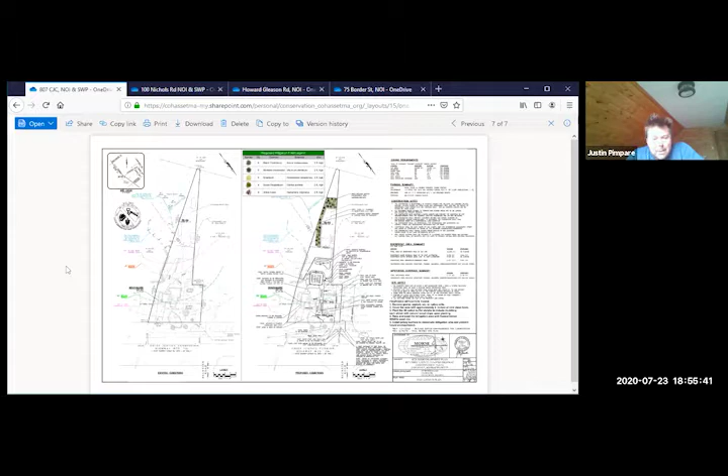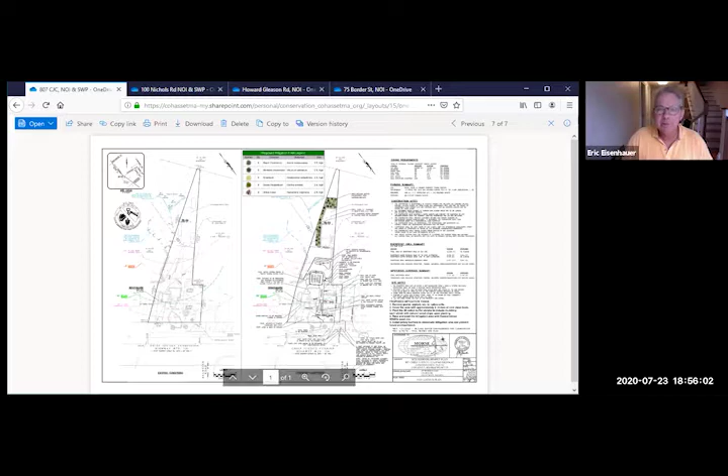Thank you, Jay, and Jeff, thank you for waiting. Before we begin, one question - I can't read your chart, is there any way you can increase the clarity? It's very fuzzy. I can enlarge it in steps. Still fuzzy - we'll have to work on it outside the meeting. There, that's better. That's good, it just takes a second to load when you zoom in. Okay, that's fine. Sorry to interrupt, but if there's a problem we'll go back to the old school method of me sharing my screen - I just won't have the Zoom annotation. That's fine, Jay, that's good.

Jeff Hassett here on behalf of the applicant. This project was approved in 2015, amended in 2016, and the permits expired before any work was done. We've resubmitted the exact same plan from the last hearing. The only change is the back area where we're enhancing the wetland buffer. There was also a question about how the BVW connected to the mean high water - it was flagged by Brad Holmes, but we didn't show it because that enhancement area was kind of an afterthought added at the last minute. But in his notes, and clear in the field, the wetland line of the BVW continues right alongside the mean high water.

The other thing you asked us to look into was whether we could improve the enhancement area further. This isn't mitigation for any proposed work - it's just an area where we saw encroachment and thought we should enhance it with plants. So we're proposing jersey barriers along the edge of the asphalt. Beyond that edge there's a gravel area with debris and parked cars - anything beyond the barrier will be cleaned up. They'll put down loam and a seed mix, which we didn't specify before, and then plant it. We increased the plantings from 16 to 30, so it's about as dense an enhancement as we can do, and the barrier will prevent future encroachments.

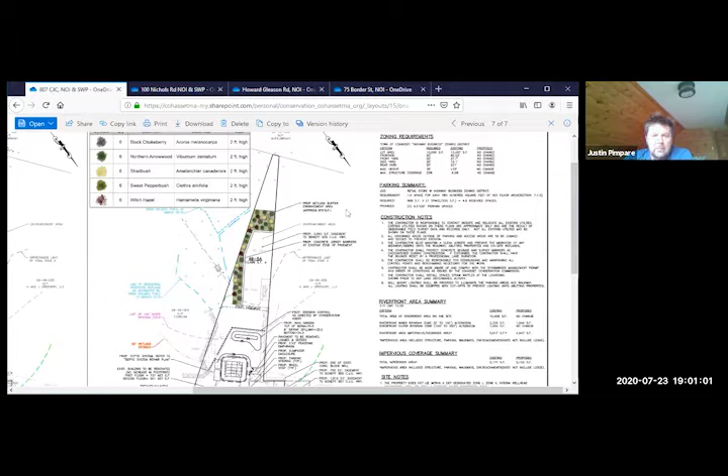Any further comment from the commission? One of the standard conditions is that any plants associated with the order of conditions survive for 3 years. So they would have to guarantee that these survive for 3 years at a minimum.

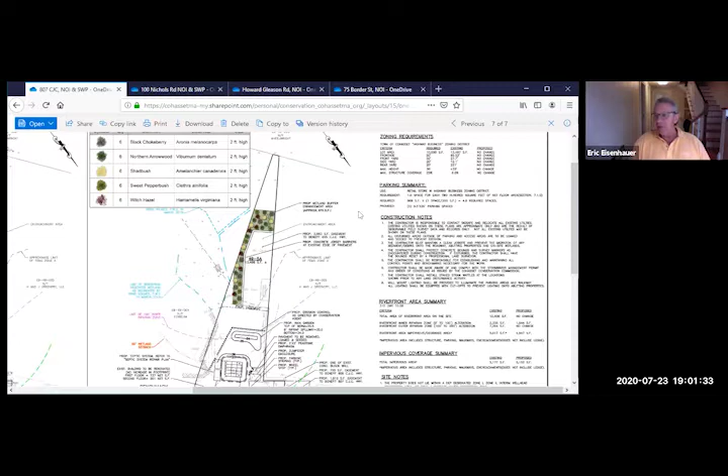There's no irrigation, is there, Jeff? No, there isn't. But that's really the advantage of having native plants. They should be able to survive in the summer, where they tend to slow down in this environment without external irrigation. So it would be the tougher type of plants. That's good.

They're out there with the hose every day watering the plants in the nursery. They could hit these as well, but there won't be an installed irrigation system. Again, I think if anyone's concerned about the plants, I would like to think that Village Greenery is going to just water these plants as well. It's literally on the site.

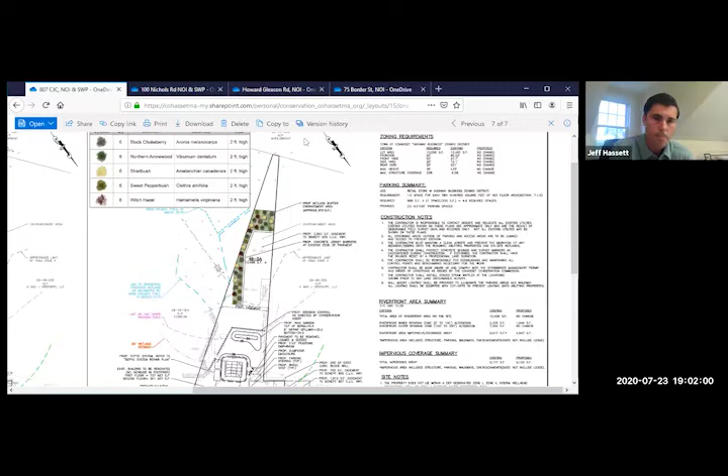Further comment from the commission? Any questions from the audience? I'm not seeing any questions from the audience through the Q&A.

Okay, well, not hearing any more comment, I think that this is a significant improvement from the original application, with the removal of the old cesspool and now a full septic system in place, buffer enhancement, the storage container to be removed, which was basically in the wetland itself, and among other things are a huge improvement to the site. So I'm in favor of moving this forward.

So, to move these things along, Jay Pimpare would like to make a motion to issue a variance for work within the 50-foot buffer zone at 807 CJC Highway. Second by Mr. Eisenhauer. All those in favor, we'll do this by roll call vote. Jay Pimpare, aye. Chris McFarland, aye. James Rosback, aye. Eric Eisenhauer, aye. Marianne, aye. Alex Coenis, aye.

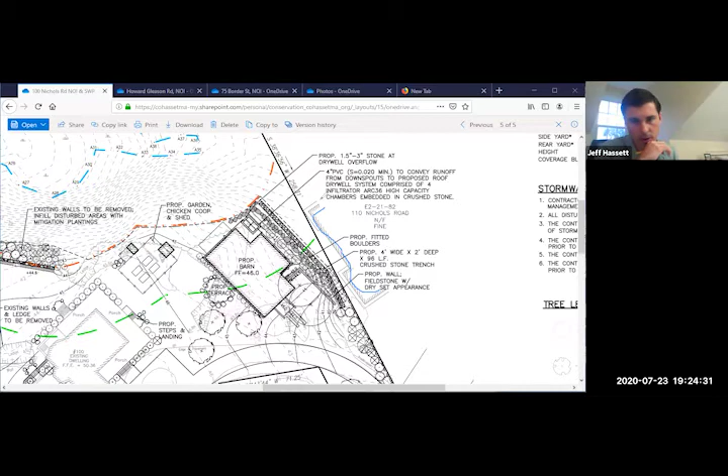Are you talking about the neighbor in front at 94 Nichols, or the abutting neighbor at 110? 110. So the stormwater will no longer go, or is no longer proposed to go, over to that little area. Yeah, right there, exactly. That's a critical area, a low point immediately adjacent to the house, right next to the property line. So anything we can do to get the water away from that area is beneficial.

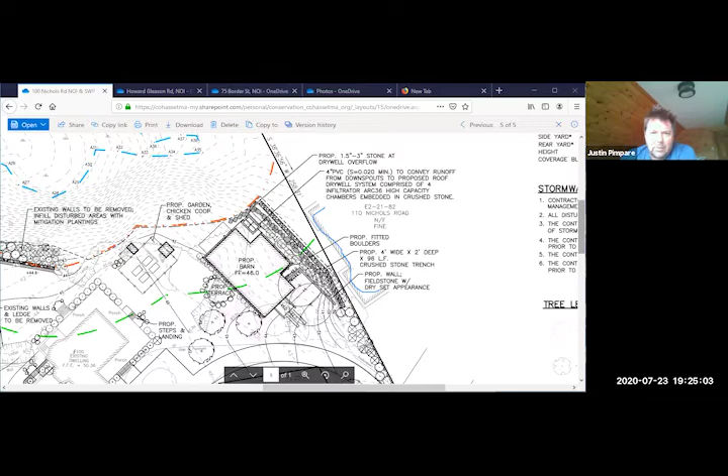Do we have a planting plan that goes along with this project? Maybe a good time to turn it over to Sean or anyone else to answer that question. But do we have a landscape plan for this? We didn't submit the actual landscape plan. All the trees are shown on this site plan, and we have the typical tree legend on the plan, and we specify all the trees to be native from your list of approved plantings - deciduous trees to be 3 to 4 inch caliper, and evergreens to be 6 to 8 feet tall. The final planting plan, I don't believe is complete as far as exactly what type of trees are going in those locations.

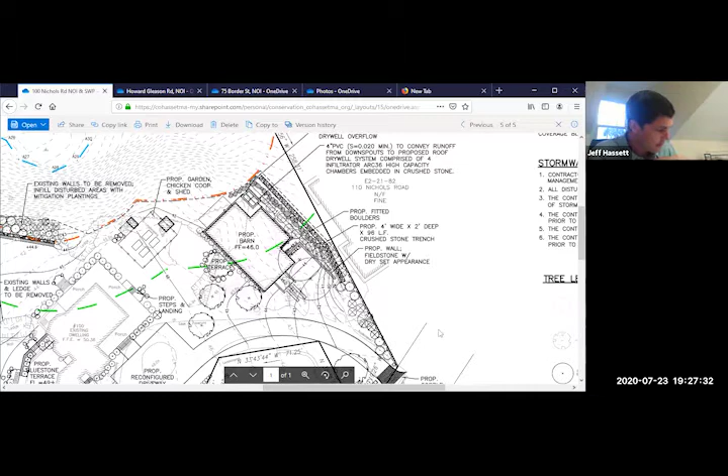Okay, that's correct. One of the issues I've made a comment on in previous hearings is that I'm looking at the tree legend on the site plan, and I see existing trees to be removed, existing trees to remain, and the proposed trees. It's really, although it might be a very light magenta and shaded with maybe a darker color, we really need to see that more finely outlined in a pink, yellow, red, or dark blue - I really have a hard time making heads or tails of the tree legend. Yeah, they're a lot more clear on the hard copy I'm looking at. I appreciate that, I'll find a way to get them to show better on the PDF. Thank you, we get the 50 and 100-foot outlined great in red and green, but we just need to get that tree legend clearer. Yep, I'll make sure that shows better on the PDFs moving forward.

Jay, may I make a few comments along this line while we're talking about it? Jeff, can I ask you to go over by the proposed pool location, please?

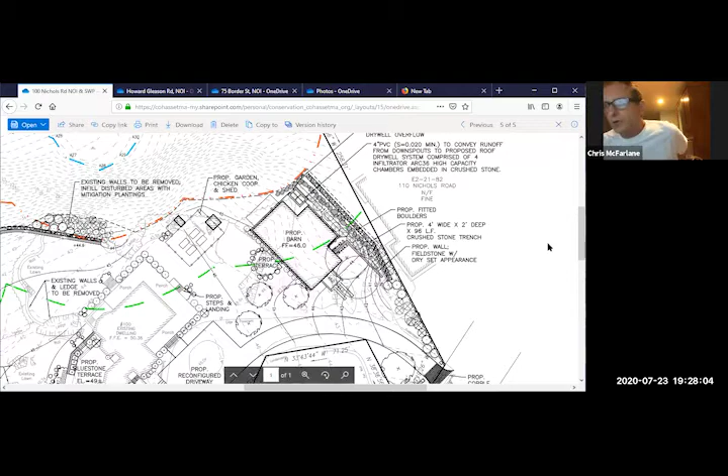Is that okay? Yeah, this is great. Thank you.

If I'm not mistaken, they're showing trees to be removed here, one over here, and then you get into the 100-foot, between the 100 and the 50. There's one here. Sorry about that. And then there's a few more which are down here. I think that gives it a total of 10.

I'd like to say that if you look at Google Earth, what you will see is that this buffer line of trees currently does something. You can tell it's a current photograph because the house out front is under construction, at least halfway done, and it's just now completed.

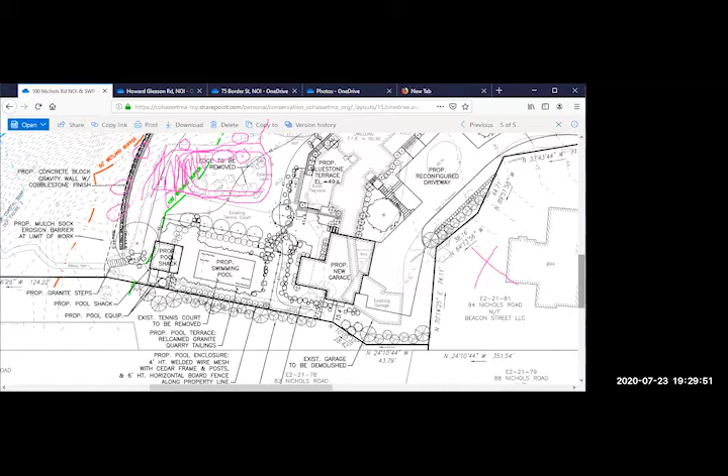So I'm not convinced that this—well, first of all, if you look right now, most of this area has already been cleared. So I'm not sure, and it gets cleared all the way back to what they're showing as kind of this tree line here, which is suggestive of the fact that the trees in this area—that area there has already been, trees have already been removed, okay?

The next thing that's important is that they're showing these trees on the edge. If these trees have canopies, they would have to be quite substantial to actually be what's creating this hedge line. So it's hard to get a feel that it's only these couple trees being removed. I say couple, I know it's closer to 10, but I don't know how many exactly are in the 100-foot buffer. But I do believe the trees have been removed already, and now there's additional trees that are coming out.

And we need a much clearer understanding of the whole removal that goes along with this project. I'd hoped to get out there myself this afternoon. You can see that there's obviously been some removal. It's got to be documented. It's got to be clear.

Having said that, we do need a final landscape plan. We need to know what the trees are. As a landscape architect, I know that 70 trees can mean a lot of different things. 70 trees could be 70 very big trees, or 70 small trees, or any combination in between. But until we have a really thorough understanding of exactly what's being removed and what has been removed in this area, the comparison to what's actually going to go in the future is really a moot point.

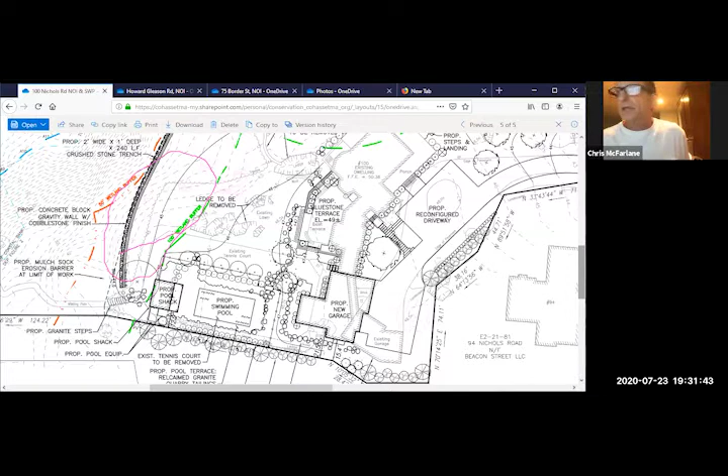Jay, can I go on? I have one other item I'd just like to talk about. It doesn't have to do with trees. Is it all right if I ask another question?

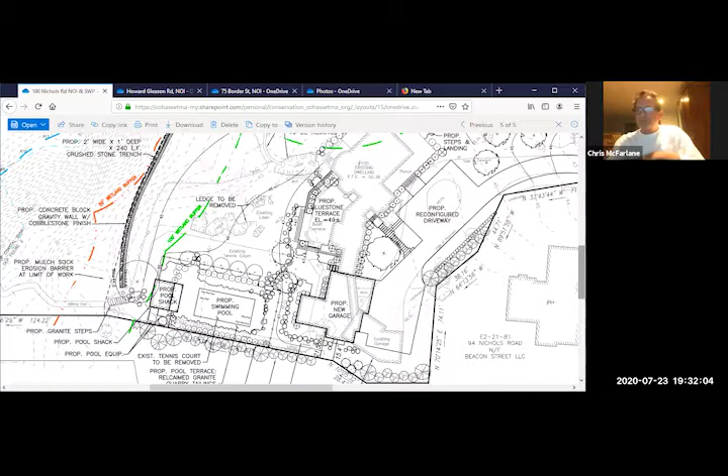Yeah, sorry, go ahead. I think we're gonna get to the landscape design portion of this in a few minutes, but go ahead. Okay, so then I'm gonna hold off then. Let's see if anyone else has comments. Why don't we get to—I know we don't have a landscaping plan. I would like to see a landscaping plan as well, but maybe we could turn it over. It sounds like Sean Papich is available to talk a little bit more about plantings, et cetera. Is that true? That's accurate. Okay, Jay. Thanks.

This is Sean Papich Landscape Architecture, 222 North Street in Hingham. So what you were looking at on the Morse engineering plan is the framework, certainly, of the landscape plan. I do want to go back into one thing that Chris had mentioned. There were not trees removed inside the 100-foot buffer at the moment. No trees were removed that I know of inside the 100-foot buffer.

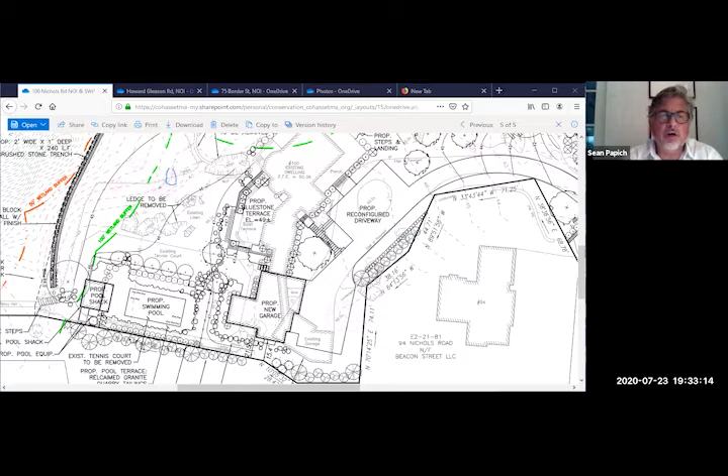There were some trees outside of the buffer that were removed—yeah, right in there, that's correct. But there weren't any trees removed inside the buffer that I know of. The landscape plan itself is intended to provide some screening between neighbors. It's also intended to be ornamental; most of that is outside the 100-foot buffer. The areas around the swimming pool, that whole swimming pool area is outside of the 100-foot buffer, other than a fraction of the proposed pool shack. So that is heavily planted.

The one thing I would like to go back to that Jeff Hassett mentioned is the retaining wall. There was some mention about it being a tremendous amount of fill. I just want to reiterate that it's the one kind of sliver, the belly of it there, where you see bottom of wall 35 and top of wall 44.6. That's where there gets to be a little bit larger amount of fill, right in that little area. The rest of it is substantially less than that. So I want that pointed out so you understand. It's really just that small area to the top part of the page, I should say. Yeah, that's correct, right around that area.

Thank you. In terms of plantings themselves over by the barn, again, Chris is right.

Combination of 74 trees could be anything. We haven't finalized all the species. We don't usually typically finalize all of the species for areas outside the 50 at this point quite yet. We usually are waiting to get the hardscape elements and the structures approved before we finalize all the plantings.

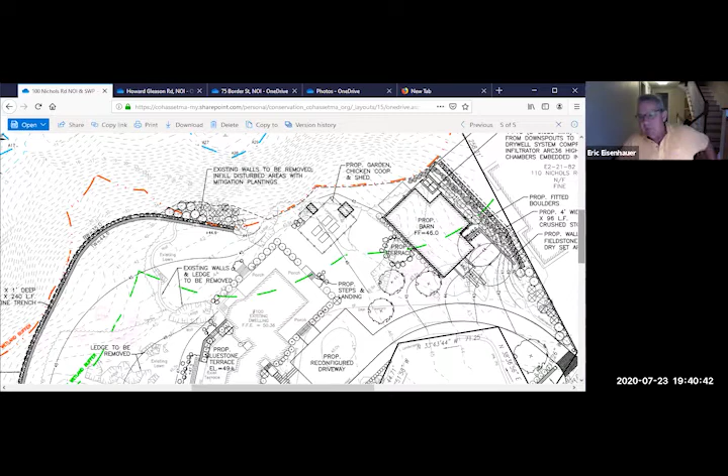You're within 3 or 4 feet of the side of that house, which to me doesn't make any sense. You have all this room to the left, Jeff, for your drainage facilities. So why are we not working to the left-hand side of the proposed barn for all your drainage soakaways, instead of squeezing them into that crowded area to the right?

The area to the left of the barn is actually up gradient, and there's exposed ledge in that area too. Where it's lawn, I believe ledge to be very shallow, so you really don't have the opportunity to put stormwater in that area.

Could you look at photograph 4, please? Or call it photograph 4? Yeah, hold on one second, let me find that. Okay, thank you, Jeff. That's 5. There you go.

There's at least 10 trees there. That's where the barn's going, I believe. And then you have the house on the other side of the red fence. I just don't see why we have to squeeze all this drainage workings into that 5 or 6 foot area between the side of the proposed barn and the house on the other side when you have all this room in front. I mean, there is some ledge there, but you can still work with it. And you get lots of trees there.

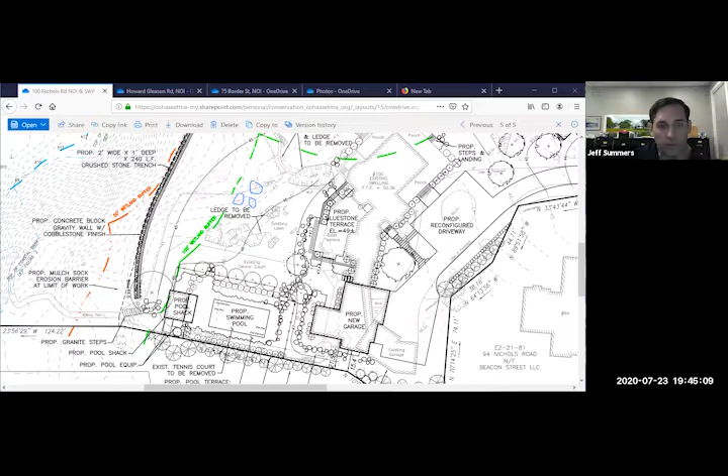Jeff, Eric here. I think there was some static. Did you say that you are cutting down trees now, or have cut down trees on this plot? So I was out there today, and I counted 4 stumps that had been cut down, and from what I've been told, are the trees outside of the 100-foot wetland buffer right there. There were some down here too, a couple along this property line.

Until we approve this, Jeff, could you halt that, please, or tell the project to stop cutting down trees? Otherwise, we have a moving target, and we don't know what's there and what's not. I don't think it's good faith to have us looking over a landscaping plan while trees are being felled along the way. That's just not how things are done, or we don't like to have them done that way. Sure, understandable.

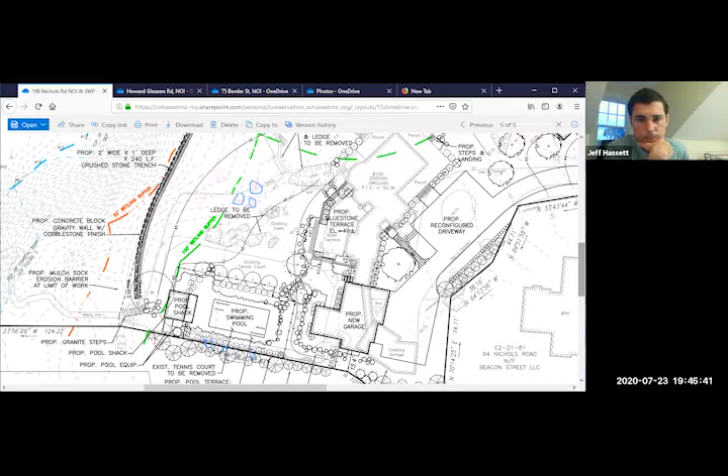Further comments from the commission before I have a couple comments myself here. All right, I will go back to the actual wall that's being proposed here. There you go, thank you.

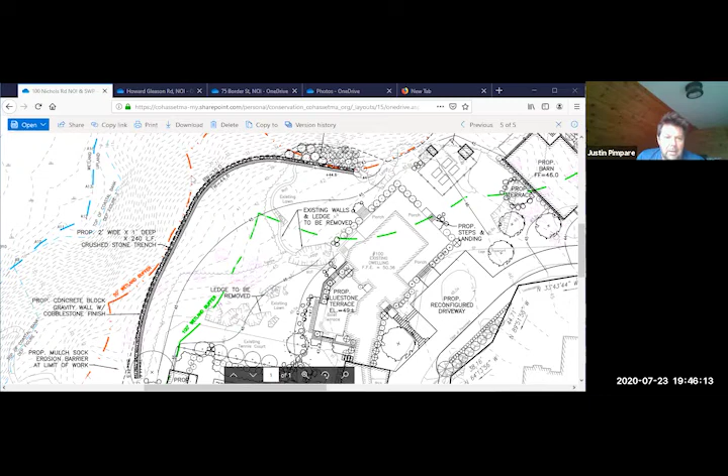So you're hovering right up against a 50-foot buffer there, and as you know, we have our 50-foot no disturbance, so I appreciate you not going over that, although you're right up against that. I would recommend you give a little bit of consideration to respecting the 50-foot buffer. I don't know how you're going to construct that. I would like to see how you're going to construct that type of a system.

If it's granite, if it's block, are you going to pour a footing there? Is it going to be like a 2x2 footing and you're going to put block on top of that? Or are you going to put block right on top of something? You're going to need to have some type of footing. So I'd like to see a little bit more detail on the actual block wall, all the while giving some consideration to pulling that back a couple of feet from sitting right on the 50-foot buffer there.

I think, with all due respect, you've got plenty of room here. If approved, it would be a significant grassy lawn area there over what you have now, and would be a beautiful site and location.

I guess I would also ask, what's going to be going on the other side of the wall here if you're bringing that wall up 9 feet? What type of safety measures are going to be put in there with respect to somebody falling off or taking a step off and going off the back there?

Not really so much conservation, but you might want to consider a little row of 1 foot, 2 foot high shrubs there. I know you don't want to put 10-foot high trees there and block the view, but for a safety measure, I'd be curious to see what's actually going to happen there. So I would like you to think about that as far as consideration. I don't know if you've thought about that. You're going to have a 9-foot drop off right there, correct?

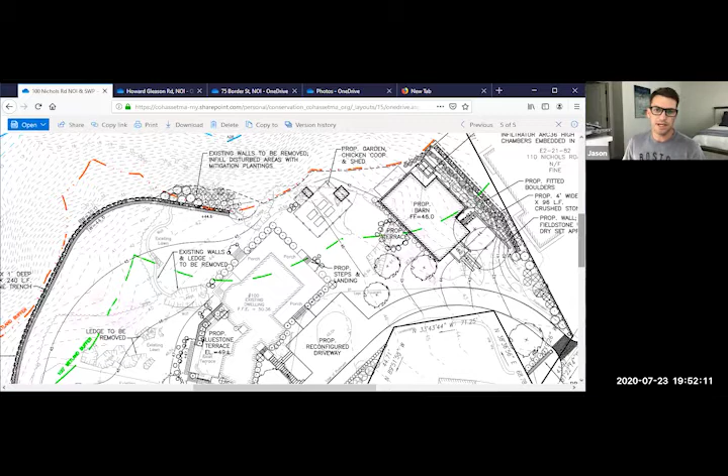I also agree there are some trees there, but we're going to plant big trees and make up for any tree we take out. The message to Sean was anything we have to take out, we've got to do 3X and make it better. Hopefully that answers some of where we're coming from and gives you some more insight. And our chickens - we don't know if they swim or not yet, so we're putting them over there again. As long as they make eggs.

Well, I appreciate those comments. Thank you very much. Not often we have an applicant that actually comes and speaks on behalf of himself or herself, so I do appreciate all those comments.

Before I forget, I want to read into the record a comment we received from one of the abutters at 110 Nichols Road: 'We'd like to register our concern at the very large size and height of the barn and its location so very close to the house, just a few feet downhill from the barn, and the loss of mature trees that provide some buffer between these two properties.'

First, I want to note that the size and height of the barn are really not within Conservation Commission's jurisdiction. The height would be within the planning board, planning department, and building department. I don't know what the actual height is, but it's not something conservation looks at. I think we are starting to address and have raised some issues about the location being so close to the abutting properties, the stormwater runoff, and the mature trees.

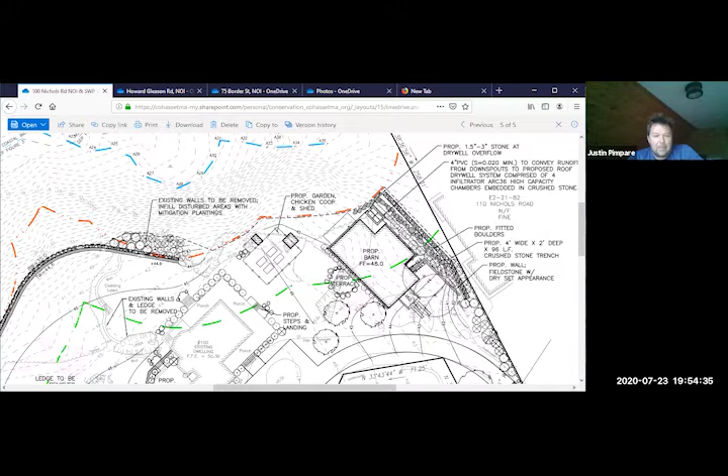I appreciate you hiring a landscape architect and speaking up, with the addition of the trees, if trees are going to be removed, and we'll work it out. Go ahead, Sean. No, I just have a couple other questions, but go ahead please. Go ahead, Chris.

Jeff, in this drawing, you call out for the paving around the pool to be granite tailings. Yeah.

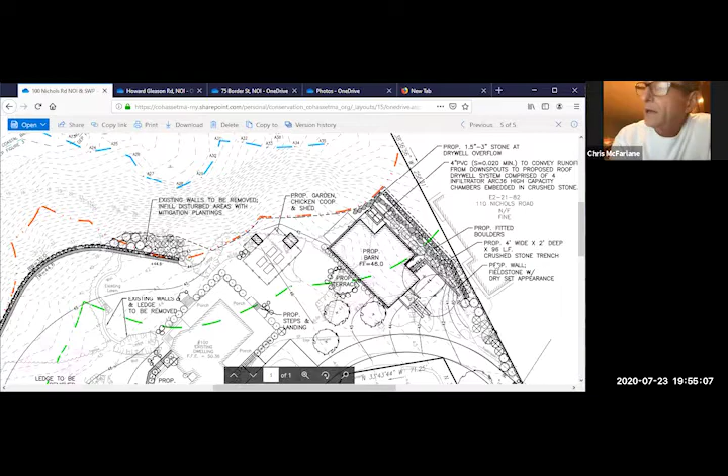That's correct. So can you explain to the commissioners what you mean by tailings? Yeah, it's another way to say irregular granite paving. So what it is, to Jason's point, he wants this place to look pretty rustic, to be honest.

He wants that whole area to feel very natural. So the intention is around the pool to use old granite as the coping, salvage granite curbing as the coping, which is a bit of a unique look, and it already has some age on it. Adjacent to that antique granite coping, the intent is to take irregular granite, irregularly shaped pieces, and use those with a fair amount of space between the joints, between the stones themselves. That little squiggly line you see there is depicting a really minimal amount of pool surround. Everything else would be softscape to the edges.

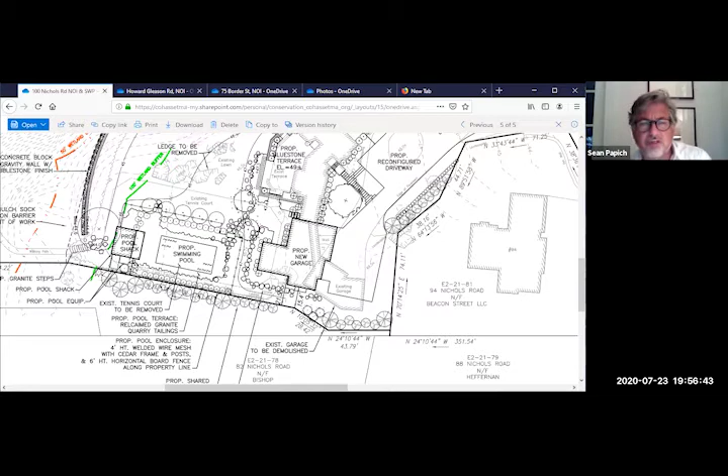So the intent is to minimize the paving around the pool to a great degree, to almost be a single band, almost looking like stepping stones going around the pool. That was the intent, and occasionally use an irregular granite or an irregular bluestone, a more rigid bluestone, but the intent was for it to feel very natural and rustic. So that's what I was talking about for the tailings—that's just how they're referenced with some of the stone suppliers we're working with.

Sean, given we're throwing some numbers around with the removal and planting of trees, were you planning, prior to tonight, to develop a landscape plan? Some type of plan? Yeah, of course, we would do one. Our next step would be to put more detail to the plant material and give a final list, much as you see on this little list that was provided.

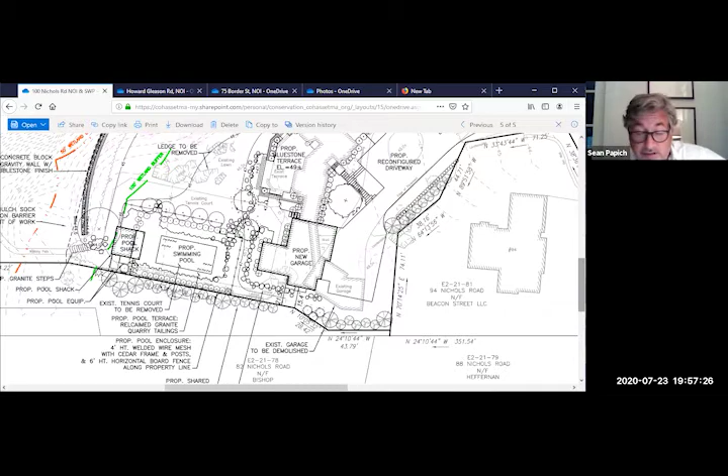Yeah, that's one of the things we were going to do that we hadn't given you yet—a mix of the native plants we're putting below the wall. The rest of the project, the rest of the property, will have detailed planting plans for that also.

For your usage, in terms of requesting more detail on the plan, we could get detail on anything up to the 100-foot buffer back to you really quickly if it comes down to that. But we'll be developing the detail on the planting plan over the coming weeks. We can certainly give more detail on the work in that 50 to 100 zone—we can get that right around to you early next week.

It sounds like all signs point to continuing this hearing anyway, so I think the focus would be between the 50 and 100. There's a lot of work outside the 100, but that falls more with our stormwater permit and not so much the notice of intent. It's within our jurisdiction, but there are far less restrictions outside the 100-foot buffer zone. So I think the focus would be on the 50 to 100.

You might want to go to 120 feet or so—don't just go right up to the 100-foot line, go a little bit over, because there are some areas close to the 100-foot buffer where there is significant disturbance.

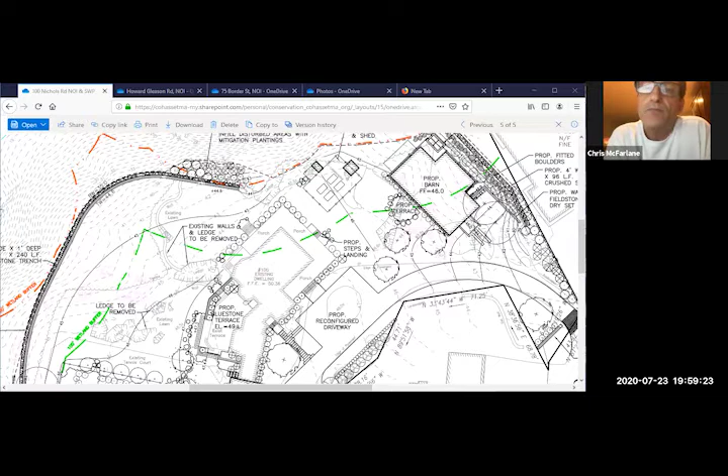And Jay, I'd just like to reiterate that Google Maps clearly shows there were or are still trees in the area between the 50 and the 100 that, on the plan, are not represented as either existing or to be removed. I think it's very important we understand that, and also important to reiterate that jurisdiction extends beyond the 50-foot no-construction zone—the area between 50 and 100 has to be given special consideration.

In this particular case, when 24-inch, 28-inch, whatever-they-are-inch trees come down, it's critical to know how many of these trees are actually coming down, how much caliper is coming down, because very quickly 70 trees of 3-inch caliper don't necessarily compute to what was there in the first place. So I think it's absolutely critical that we have a good understanding, and that we as commissioners can take an honest assessment of what we're looking at here.

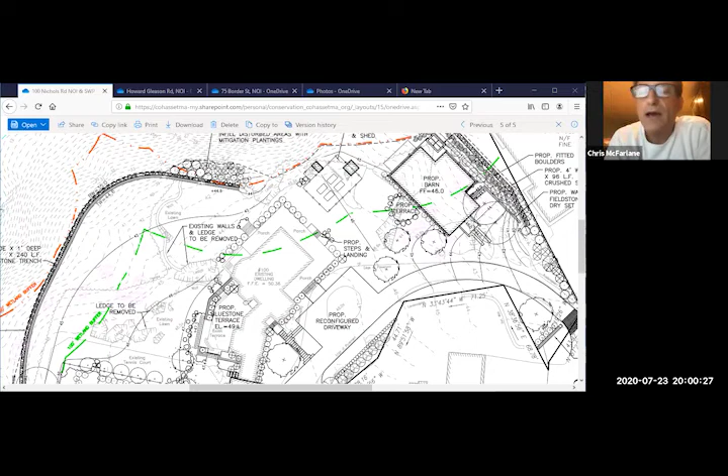I agree with Chris 100%. Good point.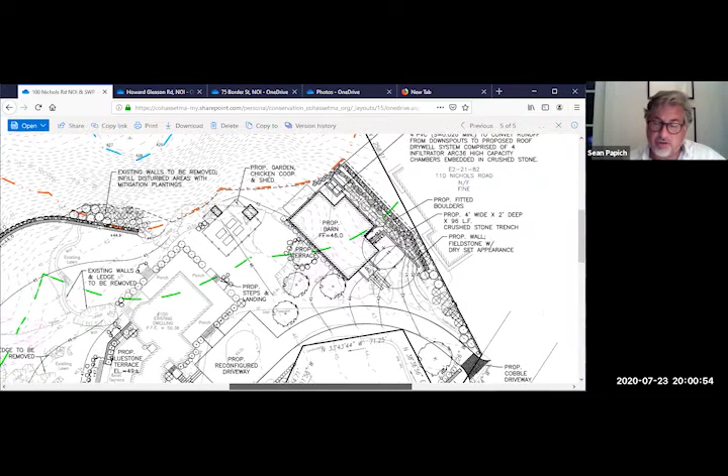Jay, can I make one comment on the barn area that's been referenced a couple times? I did want to mention that in working on an overall master site plan, the effort is certainly to relate the different pieces, the main residence to the barn, the pool area, to the pool shack. All of those have a relationship to each other.

And so the barn made some sense in that location. One thing we did do is meet all building setbacks required for that proposed barn. So in terms of its proximity to the property line, between what Jason was talking about with the ledge removal and the fact that we've kept this thing off the property line a decent distance, I think we're about 30 some feet off the property line to the closest corner of the barn. I think that's quite a bit beyond the setback.

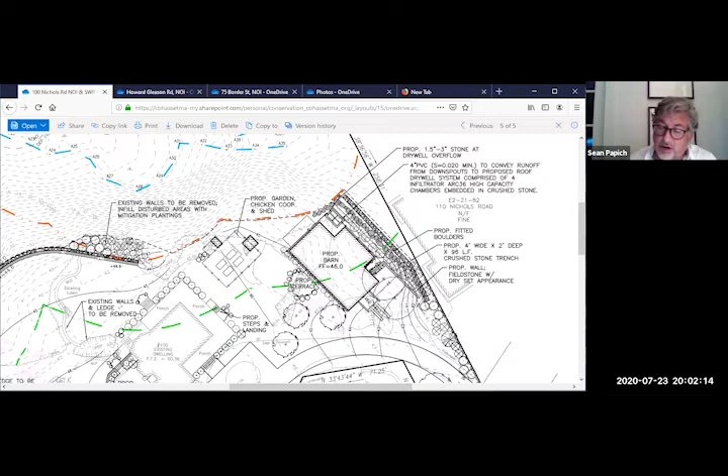So I think we did push it back away from the property line. I understand that at 110 Nichols, the house corner sits right on the property line, so it's challenging that way. I think we still pushed the barn further into the property beyond the setback, a decent distance. Just wanted to note that, and I appreciate that.

If the barn meets the setbacks and is up to building code, which is out of our jurisdiction as far as height goes, et cetera, our concern is the stormwater. We talked about potentially moving the downspouts or the dry well system a little bit more over to the chicken coop or over in that area.

So I think there could be some further consideration there. I know you've already made some steps in talking to the owner. There were some nice improvements made, and maybe there could be a little bit more along the way of getting all that stormwater from the rainwater off the roofs a little bit further away.

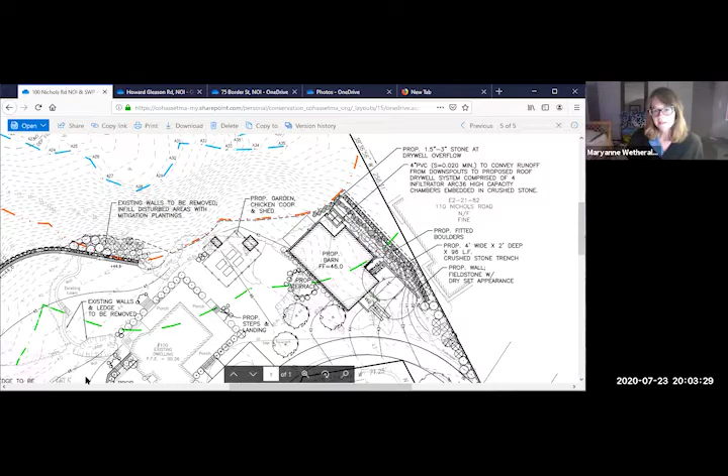I just wanted to say I'd like to hear more about the back lawn and how much fill is going to be brought in, what the elevation is going to be raised to, and how many truckloads will be brought. That's what I'd like to know more about. Yeah, that's information I can provide.

So what I have here is a little list of next steps moving along. What I would like to see, as Maryanne just pointed out, which was pointed out earlier, is the amount of fill that's actually being brought in between that 45-foot contour line and the wall itself. If you want to put that on paper as far as the construction of the wall itself, outlining again, no concrete trucks, etc.

Because somebody will call if in fact concrete was out there, someone will call and say, hey, there's 4 concrete trucks out there and a crane or a concrete pump. So we want to know exactly how the wall is going to be constructed, the amount of fill required between the wall and the 45-foot contour line. If you could further spell out the distance between the wall and the 50-foot buffer, I believe you said it was 4 feet, that would be great as well.

If there are any other physical safety measures that are going to be in place along the wall -- I believe Sean said there was going to be some small shrubberies there on top of the wall, etc. And then one of the most important things here is a more in-depth landscaping plan, concentrating on the 50 to 100 foot area, but certainly outside the 100 as well, with any removal of trees, planting of trees, and Sean knows what to do with the landscaping plan and what we look for.

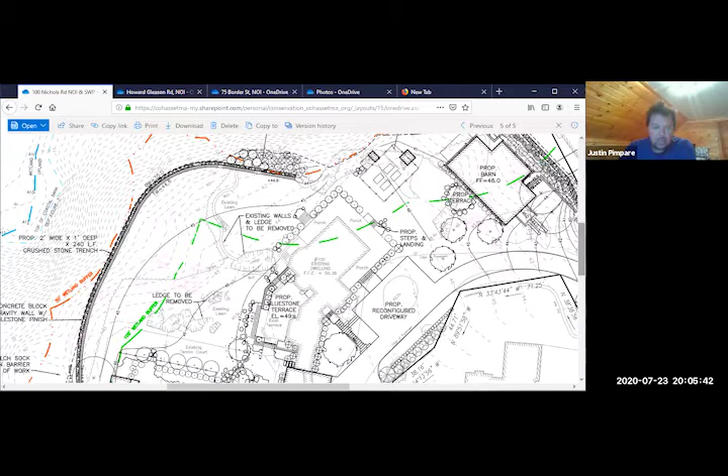And following along those lines, a more in-depth tree legend -- I don't know if that would be part of the landscape or not -- meaning the trees that are actually going to be removed, trees that will remain, trees removed, trees remain, and the proposed trees. I don't know if that would be part of the landscaping plan or part of the site plan. So those are the three big things I'd like to see. I don't know if there were any other things I missed for the commission or Jeff Summers. Please speak up if I missed anything.

No, Jay, don't - did you mention that the colors should be distinct for all the trees and bushes? Because as it is right now, I can't see anything.

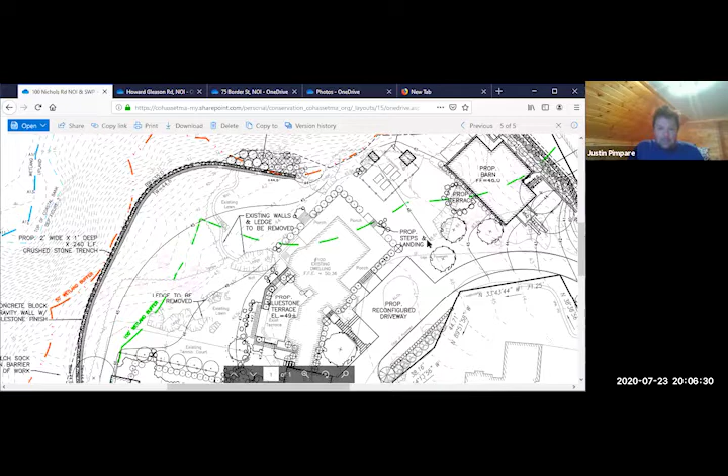Yeah, right. That would be further depicted on the tree legend, as I had mentioned earlier - trees to remain, trees to be removed, and proposed. Just further outline that, and I think we'd get a very clear picture of the proposal, what this would look like - a giant Christmas tree here by the time Sean was done with his landscape plan.

Did I miss anything else here? I've one other clarification I'd like to get. Yes... Sean, no, I might have lost Sean.

Jeff, the wall finish says it's a bluestone finish. Is that - I know the blocks that Sean was describing - so that's a faux bluestone, right? It's imprinted into the concrete block.

I'll get back to you on that - yes, this is Jason. I'm figuring I'm going to add a detail to the plan, it'll be the Redi-Rock standard detail, and I'll be able to get some more information on the exact finish of it. So I think it's critical to understand who actually will be able to see this wall.

I think there's a neighbor - you have a couple neighbors that look like they're down Orchard Cove. Yeah, Chris, this is Jason. Two things: yes, on your earlier question on the imprint, and two, to set any minds at ease - we don't want anyone to see the wall, right? We want to make sure that we blend it in with plantings, so it looks part of the natural scape.

Yeah, but where the wall is located, there's not much room for planting, so the wall itself is going to be what it is when it's done. I'm just curious - I'll go out and check to see who actually has views of it, but it's just a point to make.

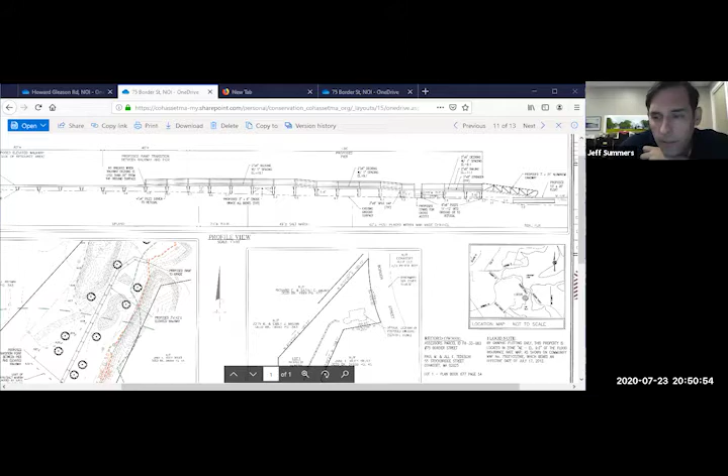Okay, can you see that okay? Yeah, I can. Could you actually bring up the summary of changes first? I think that would be helpful, at least from my standpoint and maybe from the audience. Excellent. If we could help you out here, Merrill Engineering, if we could just kind of, as a brief overview, go through the revised changes, and then we will go back and look at the plan. I think that would be helpful for everyone to move this along.

Absolutely, so can you hear me? I can't tell if I'm speaking. Yep, I can hear you, Josh. Name for the record, please. Yep, thank you. So, Josh Green from Merrill Engineers and Land Surveyors.

So if we just want to go through the letter real quick, the first thing was just stating that prior to the original public hearing, we did apply for the variance. Since then, we did re-notify abutters as well as do a legal ad. Moving down into the plan, since the last meeting, I didn't put it in here, but I should mention that we had our site meeting to review the location of the pier.

Getting down into the plan revisions from this point down, environmentally we showed the trees, as the commission asked, that are in the vicinity of the proposed pier, and we also showed the limit of the salt marsh versus the BVW. The other minor revision, or clarification, was brought up in the last meeting - there was a concern that there would be lights on the pier. We just want to make clear that we don't have any intentions to put lights on the pier. If the commission would like to condition that, we'd be more than open to it, just because saying there's no lights isn't exactly a great note on a plan.

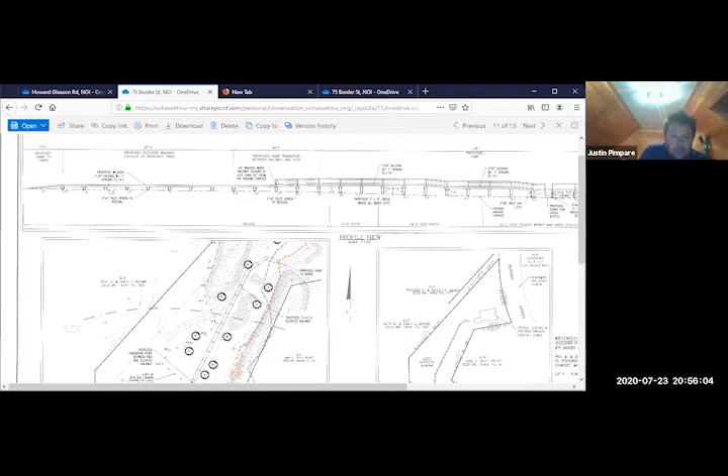Just for the record, as you mentioned earlier but not in the revisions, the commission did do a site visit out at the property. A number of us were out there and did a walkthrough, the little walk out through the salt marsh. In full disclosure, I also went out with the harbor master along with two other commissioners, not for a site visit for this property, but for a tour of the Gulf River, and looked at other remaining docks in the area. There was no discussion at all with respect to 75 Border Street, it was more of a fact-finding river cruise along the area. I found that very helpful in looking at other docks in the area. So I'll turn it back over to you, Josh.

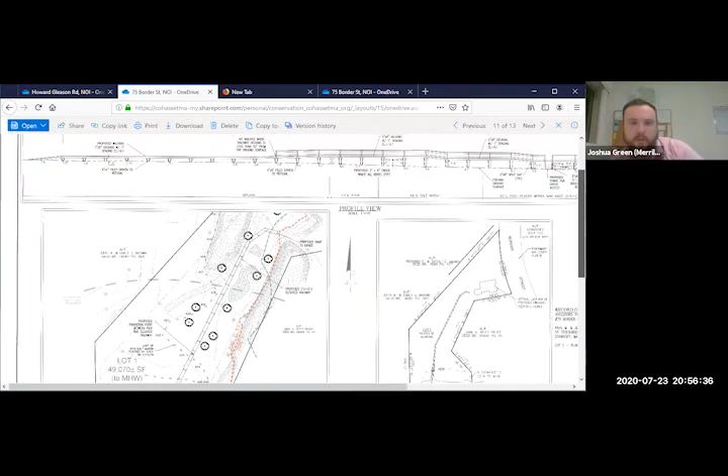Yeah, so the biggest thing, Jeff, if you scroll down a little bit, or we can go off the profile, but it's clearer in the plan view where we show the proposed stairs. That was the biggest change we didn't mention in the letter, the 3 foot wide, 3 foot high stairs, and a slight change in location. You can see we're using that kind of man-made channel in the salt marsh to reduce the overall impact to the salt marsh and the length of the pier over the salt marsh.

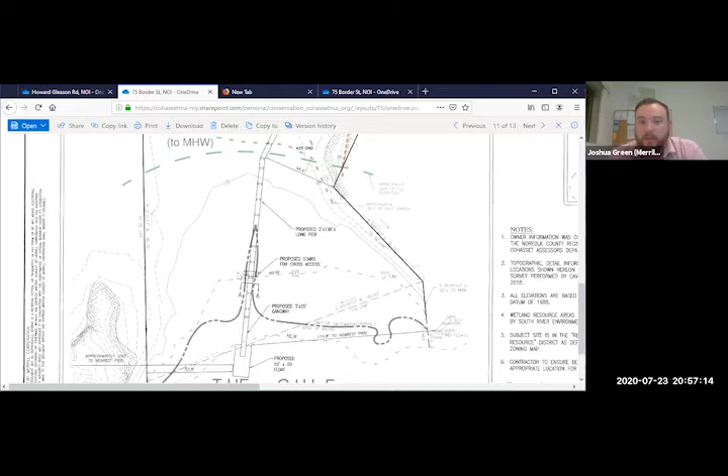I just want to mention those stairs are there for access, that's to meet Chapter 91 reg for the state. So that's the reason why those are there. Because the height dropped, we need to put some type of access over at or near mean high water.

And what is the height there exactly, Josh, above the water line? What's the exact height at that location? At the stairs? Yes. From the salt marsh, which would be, it's right at, you can see mean high water is that dash line, so it's right there, about 3.1 feet. So the 3 feet is the top of the pier, or the decking of the pier, not the railing, the decking itself. It's the lowest structural member, so it'd actually be the stringers running across.

Okay, and what are those stringers, are they 2x8s? The stringers are 3x8s. Okay, so a 3x8? Yep. You don't get those at Home Depot. Okay, so you're probably looking at 4 feet. Yeah, up until the decking. You're looking at an elevation of 4.3 and the decking is at 8.1, so you're looking at about a 4 foot to the top of the decking. Okay.

Maybe it'd be good, since we're up here, to bring us back, or start from the end and go backwards, and explain the height differences. You already talked about the stairs, but walk us through that, please.

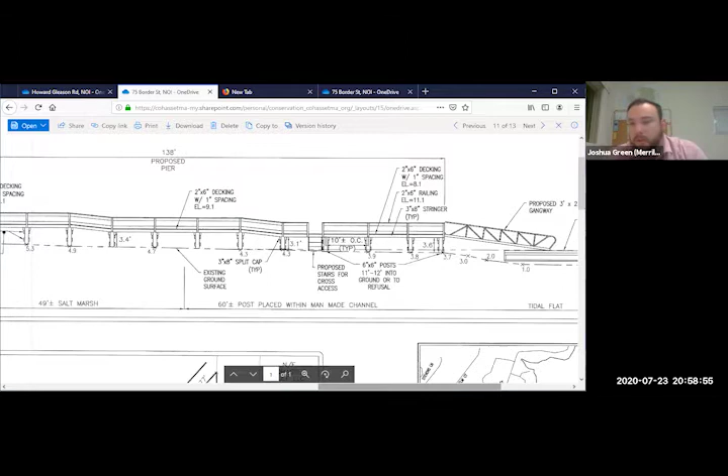The overall design of the pier is very similar. It really just shifted down into the existing ground surface, in the most drastic area it dropped about 2 feet, everywhere else at least 1 foot. The more drastic change happened towards the water where the stairs are, since that's the portion of the pier people see most, so we wanted to keep it at the lowest height possible. As you move up, we just did what made sense with the natural topography out there.

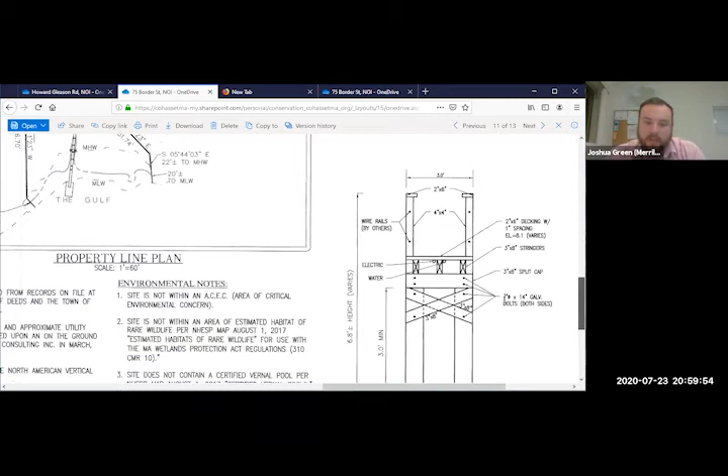What is the distance from post to post? What are we talking about as far as distance between the two posts? The posts are placed 10 feet on center. Are you asking about width, or in between each bent? Length, so there would be a proposed wire going between the two posts. Yeah, that'd be roughly 10 feet on center, if you look just to the right of the stairs it shows 10 feet on center.

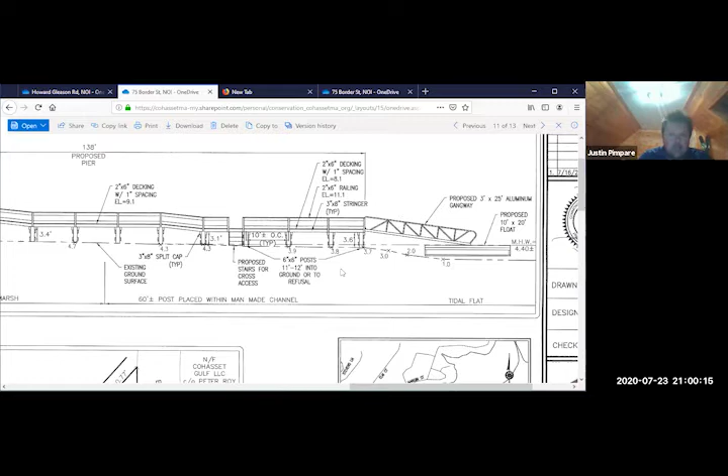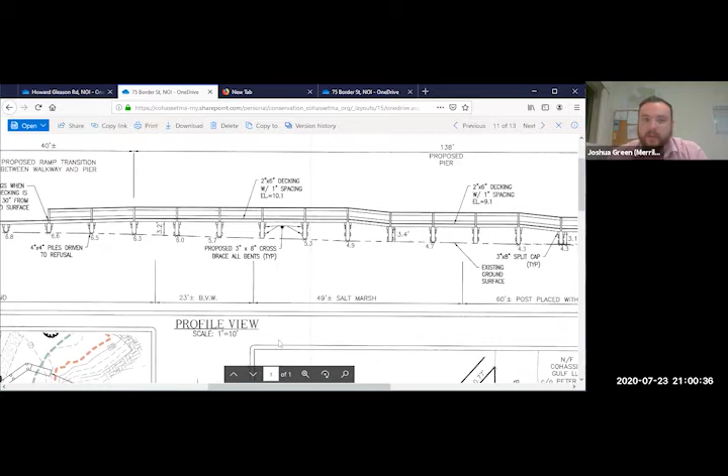Please continue. So moving back, most of the changes happened towards the water, the section we're looking at here. As we move to the left across the plan, you'll note that instead of BVW and salt marsh, it's broken up into the two now. From here going left, it's very similar to the plan you saw originally. Basically from where the railing disappears back, it stayed the same.

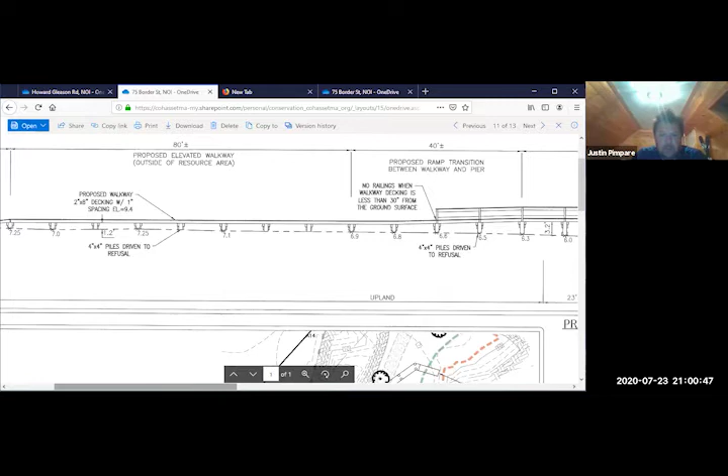And as far as the actual gangway and float, did that location change at all? It shifted. Explain that a little bit.

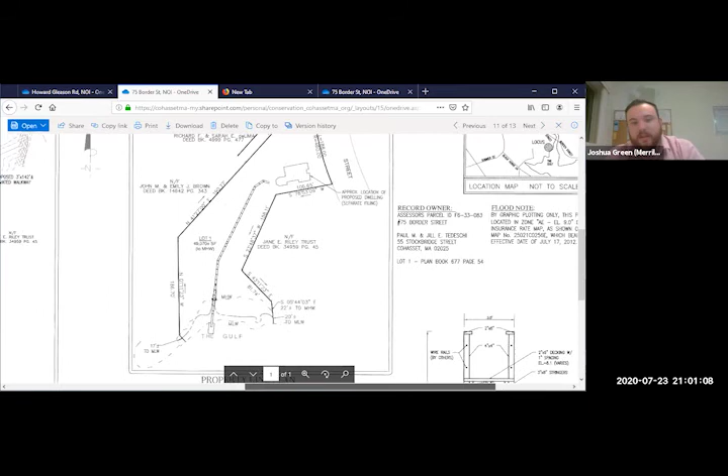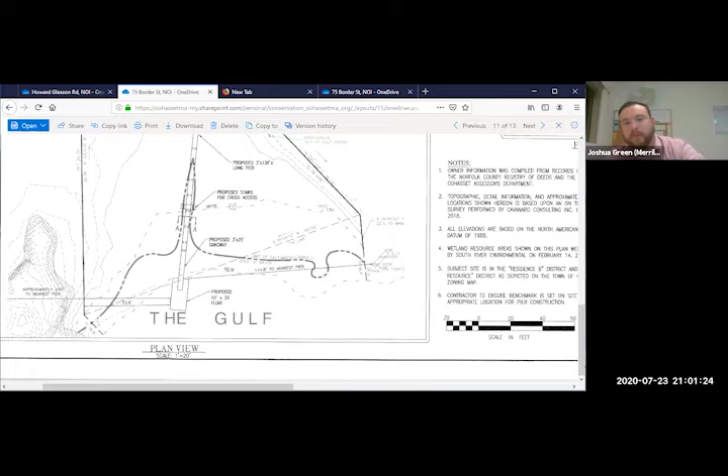Before, the pier ran just to the left of the man-made channel we're utilizing now. So for the pier and float, I kept everything the same length, it really just shifted to the right. So the float now is completely within mean low water. The only reason it wasn't before is because it was to the left. We haven't pushed it out, it's just that by moving it to the right, it's in a better location for the float, giving it a better chance to stay off the substrate for as long as possible.

What do you mean a better location? One of the major concerns regulatory agencies have is with floats resting on the substrate, the bottom, the tidal flat, or the riverbed. In this case we know it's going to happen, so we've provided skids to keep it from having the total base of it on the flat. When you have it further out into the water and it's able to float for a longer time, it's better for it, but in this case it's not practical to go to the point where it would float the whole time through both tides.

What are skids? They're thinner pieces of wood that go on the bottom of the float, so instead of the whole area of the float being on the flat, it's concentrated on a smaller area. It's what DMF, the Division of Marine Fisheries, recommends when you aren't able to maintain the proper depth at mean low water. So it's like having a pair of skis on the bottom of a big float. Exactly, so you'd still be touching the bottom at low tide. Correct, and disturbing the bottom, just not as much. Exactly, it's a mitigation for it, but it's very common.

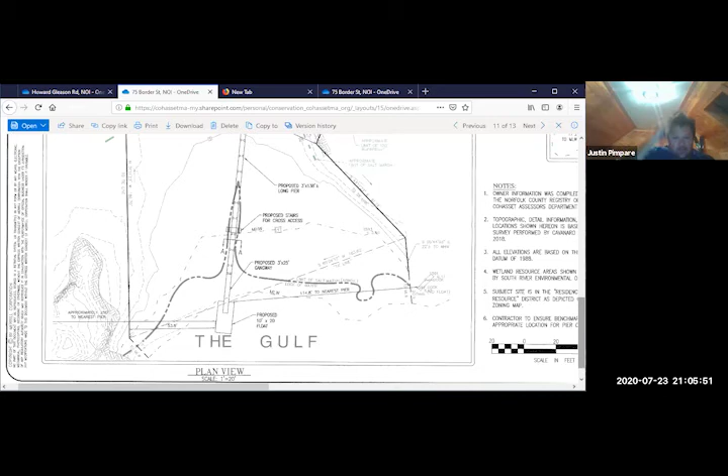So when you say an outlet, I can certainly understand wanting to charge your phone. But then I look at that on the flip side, and I think at nighttime, the only reason you'd need an outlet out there is for either a radio or a light. And we had talked earlier as far as there would be no lights out there. I know sound certainly travels quite a bit in all areas, so I would question what conditions the outlet would be for, but it wouldn't be for lights.

That's correct, I've asked the applicant. He has no intention of putting lights. With the concerns from the association on those lights, I completely understand having a condition. There aren't, that I know of, just looking around. I wasn't able to go on a boat tour, but I didn't see any major lights on the piers around the area, so I think it's completely understandable to have that condition.

Or conditioned to have no electricity? The lights, I mean, I can ask the applicant about the electricity. Like I said, it's just a common thing for it to be there. The radio, because of the ability for portable radios, I don't know how I could directly answer that one. The lights, I know, are a common issue on piers.

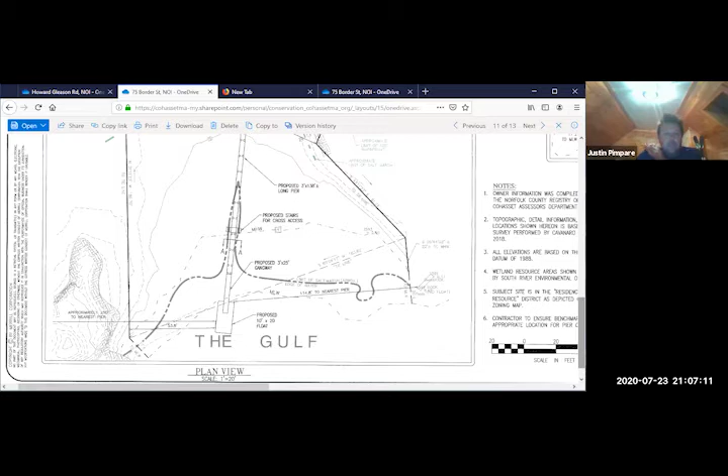Okay. Sorry, Jeff Summers, any comments here in addition to what's been made? I know that what you've also put up on the OneDrive is similar projects and other photos here, and I'm looking at some of the photos as we speak here.

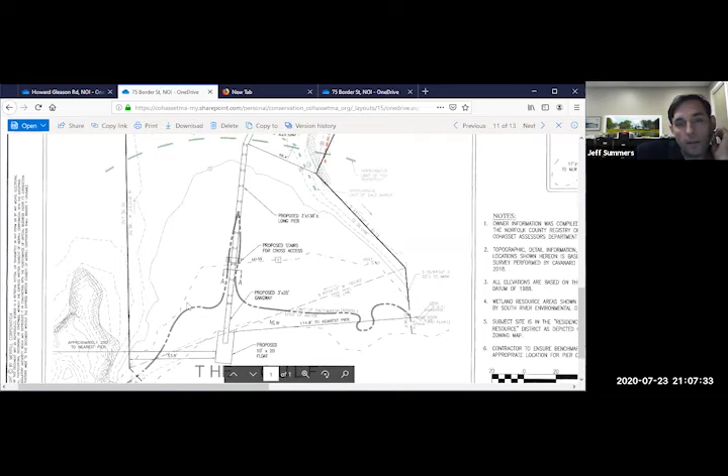Any comments on this? Well, I was just going to say that the original project had the dock pretty much, I think it was on this side. So what they've done is use the man-made cut, and there was some debate about what those were originally used for, but to use this area to minimize the impact on the salt marsh. So as Josh said, the reduction was from, I think, 135 feet down to 49 feet over the salt marsh, and the reduction of the width from 4 to 3 feet.

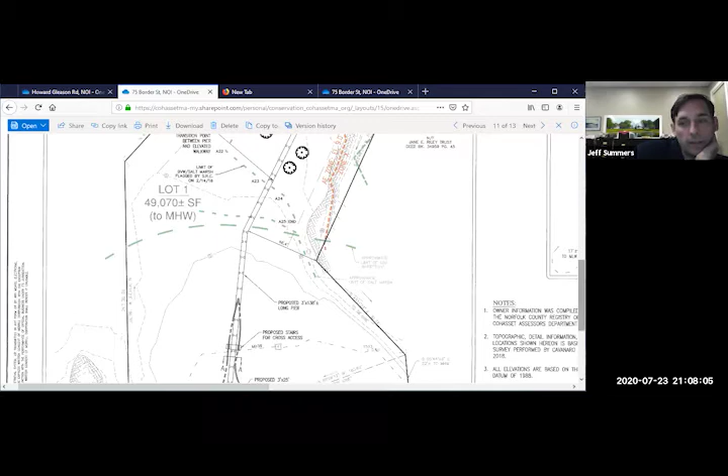I don't really see how they could minimize this any further. And then up in this area, they did show the trees that were out there. I wanted to mention too that Josh did send us some photos of similar projects that showed a wire railing. I don't know if anybody wanted to see any of those. I'm actually looking at those right now as we speak.

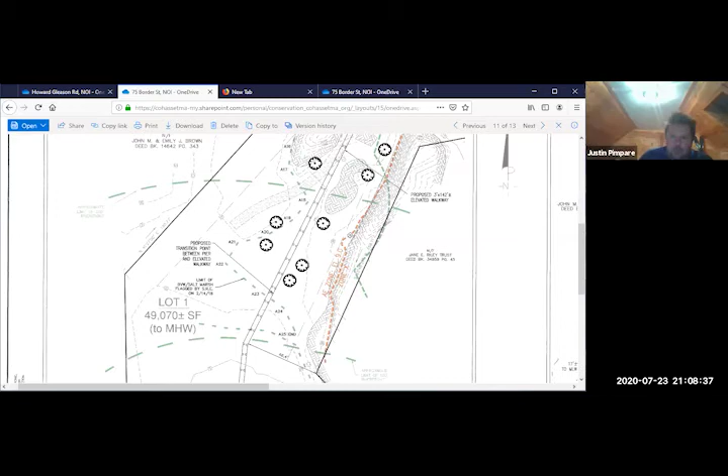I think it would be great if you could pull some of those up, Jeff. Yeah, I'm just gonna have to go to the Border Street filing, and from the Border Street filing, you'll see the examples of the wire railings, because you uploaded them to the OneDrive.

Yeah, it'll just take me a minute to get there. Sorry. Yep, no problem. It's under.

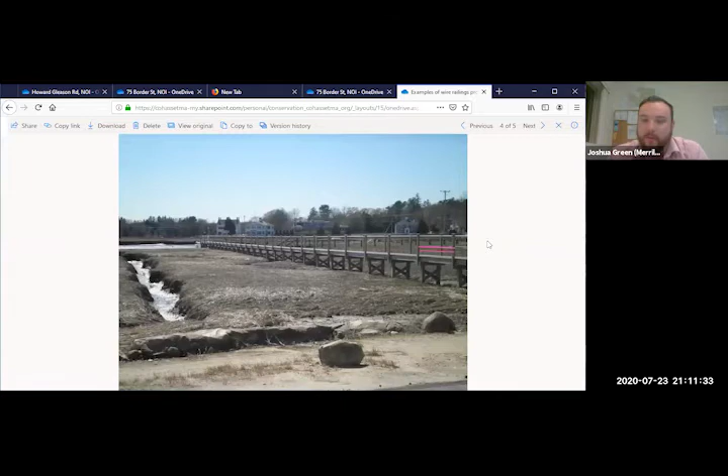Do you know where these photographs were taken? All these are in Duxbury. There was a comment question asking where the photos were taken.

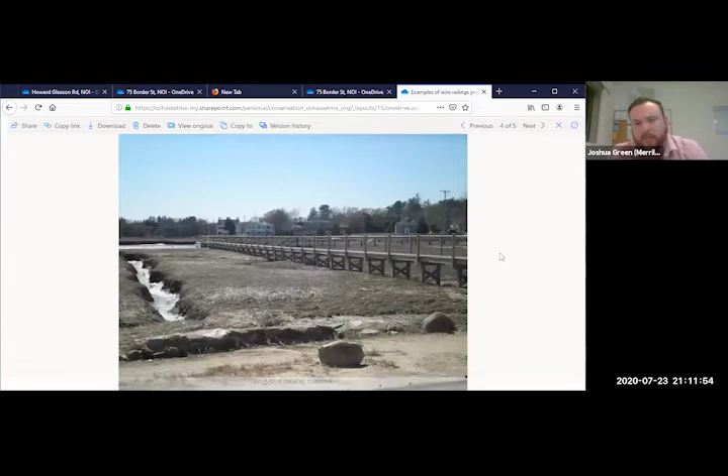Okay, Josh, may I ask you a question? That last photo, when was that built? I believe that one was built in the last couple of years. Can you go back to the first or second photo, please? Yep, I'll tell you when to stop. Not that one, one more, I guess.

How do you even keep tension on something like that? It looks like you could use that as a high wire act. Yeah, they're screwed into each post. I believe that's how it's done. I think Keith's on here, he might be able to speak more to it. I believe they stretch them out by screwing them into the post, and that's how the tension's kept.

So we just had a question: is it wire, but the top is wood, is that what we're seeing here? Yeah, the thin wire doesn't serve great as a handrail, but it keeps a pretty good barrier for people falling off. The handrail itself, we originally proposed two thicker pieces of wood as the handrail. We revised that to be a single 2x6 as a handrail instead.

Okay, so let me get this straight. The picture we're looking at right here is actually wire, correct? There's wire in this picture. But your proposal right now is to use a 2x6 piece of wood?

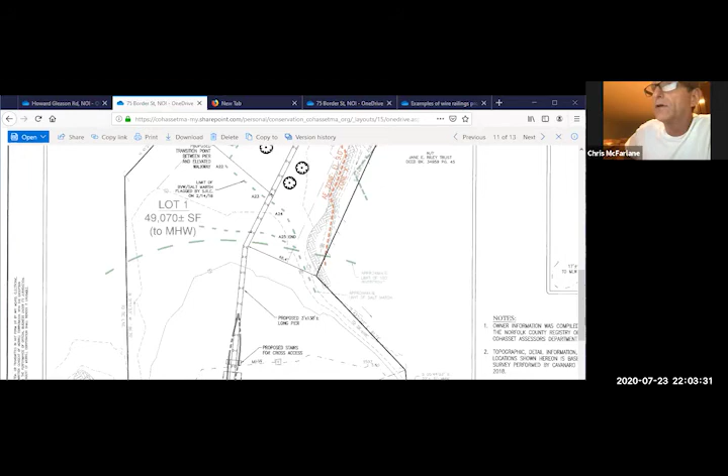So it wouldn't necessarily have to be at the back, it could actually be at the front. There's a number of ways to do it. But one of the ways they do it is, go down all the way to the river if you would. So you can see that little nose sticking out with that cove there. That's an area that's probably gotten washed out because the neighbor's dock is probably hard-faced, and you're getting a little bit of wave action in there, which is causing it to erode.

So one of the ways they do this is they actually harvest the Spartina and wrap it into large wattles, and then they basically build a wall out of that. It basically reseeds—the seed that's in there starts to grow out of it—and you've basically, in a man-made fashion, recreated the peat that is the base of a salt marsh.

Now I'm not an expert, so I'm not going to stamp that drawing—Josh would have to get his people—but I do think this: you can see how this whole area is kind of dug back a little bit. I think there's a lot of opportunity to actually extend the salt marsh right into some of those areas. And if Josh thinks that potentially that's a mitigation they'd be willing to undertake, I'd be in even more support of the project. Because I think it would prove for future projects that this is a possibility and something to be considered.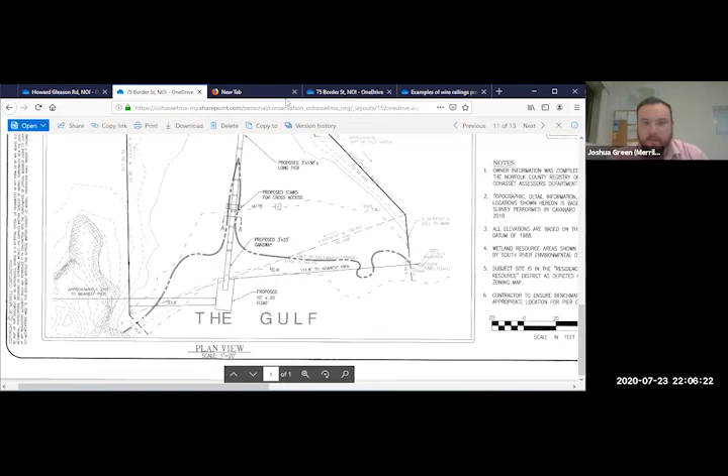Josh, having heard that, is that something you would be willing to entertain? I just think it'd be a better effort than an environmental review. I would like to reference the DMF letter—they have a plethora of studies that they do, they do them all the time. They understand the impacts that piers have to the resource areas and coastal areas. I imagine a third party will find the exact same results that they do on their studies that they reference in their letter. Those studies, while not the best or most entertaining read, are informative, and they were on the original letter for DMF. That's what they're signing off on—they reviewed the impacts of piers to these resource areas and said that it is negligible.

So I understand that Cohasset itself has the bylaw on the salt marsh, or regarding the salt marsh. So I feel like doing a mitigation for that area of the piles would be a better effort or more cost effective than just jumping to a study and then coming to a conclusion where some mitigation might have to happen after it. It just seems to be skipping a step. Okay, all right, I'm certainly amenable to that.

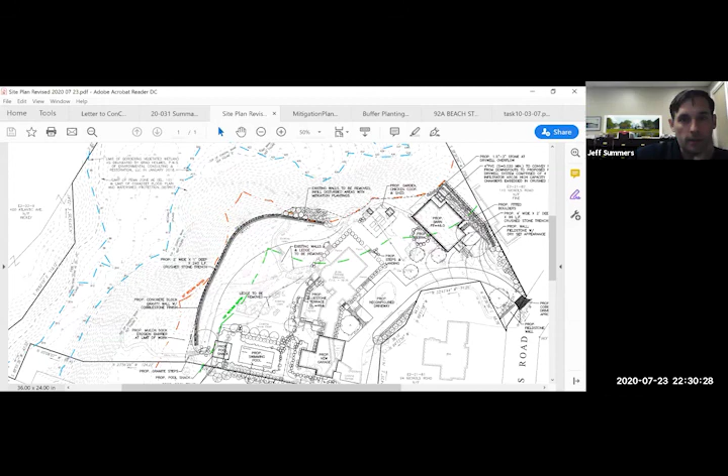What did you want to see? I want to show the letter. Okay, hold on, from the Gulf Association. Yeah, it'll take me a minute to find it. And it's probably not coming up. If you could just show us the letter.

So actually, I'm going to read the letter here. This is a letter that was submitted earlier today, dated July 23rd. I'm going to read the letter for you. It says, 'Dear Mr. Chairman, the Gulf Association has reviewed the revised plan proposal for 75 Border Street and is appreciative of the efforts made by the applicant to address our stated concerns from our June 23rd letter. We conducted a site visit with the property owner on July 21st, and from our perspective, the new plan is improved. While there is still alteration to the salt marsh, which triggers the need for variance, the applicant has made efforts with their new plan to reduce its impact.'

'However, we feel that further efforts need to be made to improve aesthetics. The applicant cites 33 Cedar Lane as precedent for their proposal. Accordingly, it is a strong preference of the Gulf Association that the applicant seek and make good faith efforts to eliminate the railings from their plan. Similar to 33 Cedar Lane, as you can see from the photo below, the walkway at 33 Cedar Lane protects the interests of the salt marsh while disappearing into the landscape to protect the aesthetics of the area. Thank you for your consideration. Sincerely, David Dwyer, the Gulf Association.'

And there is a photograph of the actual pier itself. This is a 3 foot by 3 foot pier with no railings. And I don't know, Jeff, if you have a chance to pull it up or not, but we're at 10:30 at night here, and this is going on for a while.